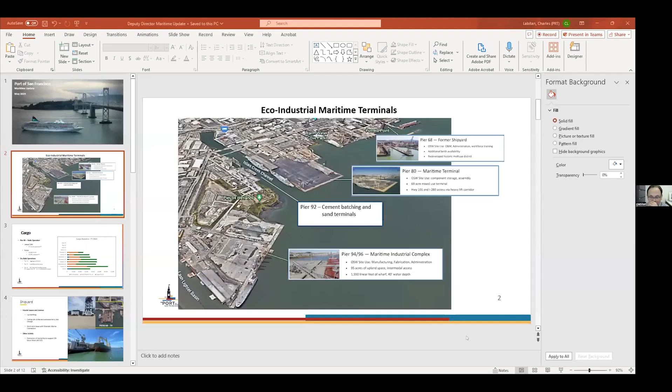Let me share my screen since I did not send it in. Make sure I do this right. There we go, can everybody see that? We can see it, thank you. So I'm with the Port of San Francisco, and Kristine did a wonderful job explaining what a port does.

And how ships enter the bay and make it down to Redwood City. However, they do pass San Francisco up here. So what I'm going to focus on today is really where the Port of San Francisco is at in terms of its business and trends, and what our plans are for the future.

As most of you know, the Port of San Francisco is very diverse. We have commercial operations, Fisherman's Wharf starting from Pier 39 all the way down to Pier 96. Along the way, we have ferry services, cruise ships, which is one of our biggest revenue generators, the Ferry Building, recreational areas, South Beach Harbor, and Oracle Park. So we're very diverse.

What I focus on is mainly the cargo operations. Let's see here, go to the next slide.

So we have what we call our eco-industrial maritime terminals. They start around where Chase Center is at, Mission Bay Park. We have our Pier 68, which is the former shipyard, and it goes all the way down to Pier 96, down by Heron's Head, which almost borders the Bayview area of San Francisco.

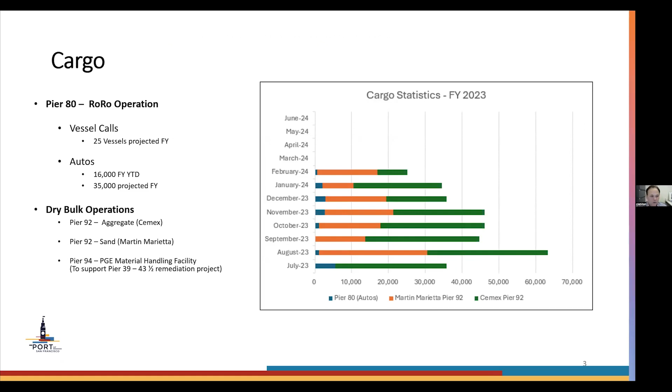I already mentioned the shipyard. This is our Pier 80. We are also planning to convert some of Pier 80 into cruise operations. This past April 27th, we had one of the Princess Cruises come in, and Metro, which operates a cruise ship terminal, brought their facility down and set up a pop-up type facility.

The reason why is because under the CARB rules, we're only allowed 19 cruise vessels into a facility that doesn't have shore power. And we only have one shore power hookup for our cruise ships, which is at our cruise ship terminal. So we had to divert one of the ships when we had 3 ships in port down to Pier 80.

And you can see how close it is to the city. We have Highway 280, which is only about half a mile away, and Highway 101, which is about 2 miles away.

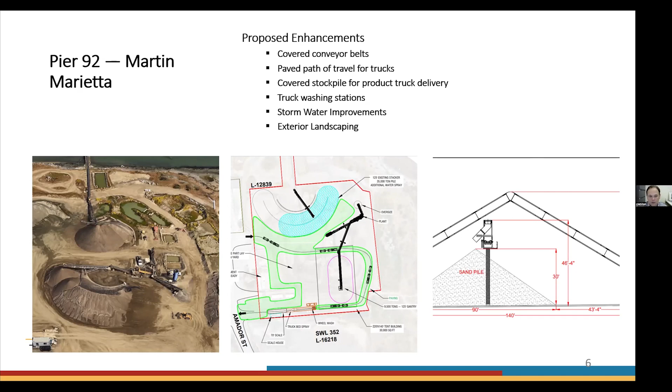Pier 92, Martin Marietta, they will be moving from Pier 94 to Pier 92, and they are setting up a modern type of facility that's going to be completely covered. That's because the Bay Area Air Quality Management District has been monitoring their operation, and we have a Bayview community only about half a mile away, so we're trying to reduce the air emissions. They're going to have to make their offloading from barges pretty much enclosed.

For Pier 94, 96, we have the offshore wind industry that we've been following for the last 2 years. We've had developers come out and give site tours, probably about 4 tours in the last 6 months. This is 95 acres of land.

As many of you know and have followed offshore wind, the industry is going to be so large that not one port can serve it. Long Beach and LA are planning to build a 300-acre terminal, and most of the work will be going down to LA. Port of Humboldt will also have a large facility up there. But those facilities are probably going to take a good 6 to 8 years to build out.

Our facility, we already have 95 acres, even though we would have to build up and strengthen the surface. We already have about 40 feet of draft depth along the wharf. So we can be an early stage development for offshore wind.

However, because of the 200 feet of airspace underneath the Golden Gate Bridge, we won't be able to build a full tower for the wind industry. What we will be doing is building the manufacturing and fabrication for the foundations. It also helps that CEMEX is only 100 feet or a few hundred feet down the road, and much of the foundations will be made of concrete and cement.

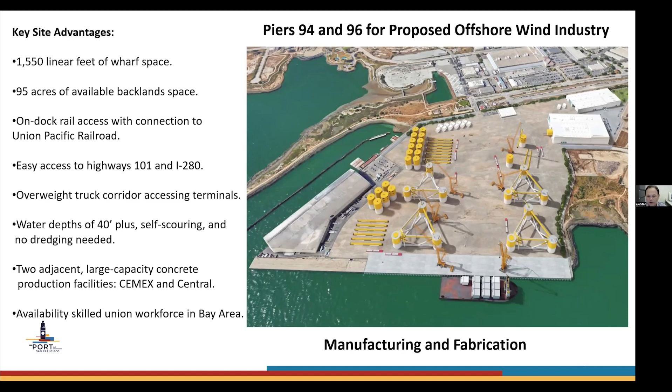Jumping over to cruise ships, because it is one of our larger businesses. So far this year, we've had 60 cruise calls. We have about 34 scheduled for the end of the fiscal year, end of June. We've had 235,000 passengers. Cruise has rebounded very nicely for us.

So there has been a rebound of cruisers coming in to San Francisco. Many foreigners, we're starting to hear them speak with their accents as you walk down the ferry building. We expect about 400,000 total for the fiscal year.

The other activities we have at the port, we have had the U.S. Navy's Harvey Milk. It was recently launched down in San Diego. It came up here. We had a launch ceremony with Congresswoman Nancy Pelosi, who came in for that.

We had a Japanese Coast Guard ship that comes in every year. We also had Sail GP, which many of you may not know is the Formula One for sailboats. We host that down at Pier 80, and that happens sometime in July.

We also have the Portola Music Festival. During the fall, at Pier 80, PASHA works with us to host this music festival. It brings in about 30,000 participants, and it's more like electronic dance music, but it's a big revenue generator for the port. We also host the San Francisco Fleet Week.

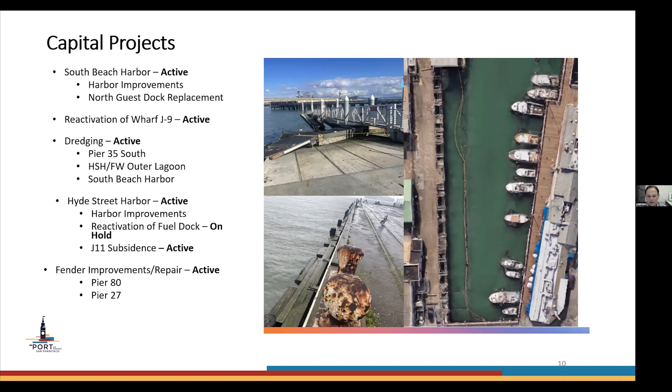Some of the equity things we do for the city: we host a youth sailing program, and PASHA helps us with that. We also have others that come in for Sail GP. We have an internship program with Tides, and we also work with Cal Maritime on internships.

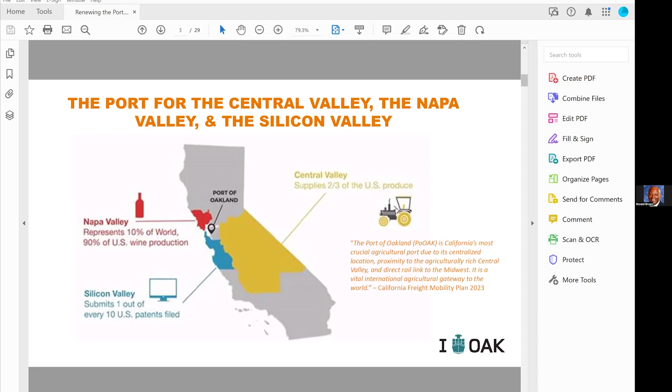Oakland is a little bit different than the ports of Los Angeles and Long Beach and many of the other ports in California, being that we not only manage a large seaport, which is mostly containerized, but we also manage the Oakland International Airport. As some of you know, we just renamed that to the San Francisco Bay Oakland International Airport, which has created a lot of consternation for my friends in San Francisco, but we're going to go with it.

We also manage a very large portfolio of commercial real estate along the coast between the Oakland San Francisco Bay Bridge and the Oakland International Airport. That's about 20 miles of commercial real estate that we manage. A lot of that is open space.

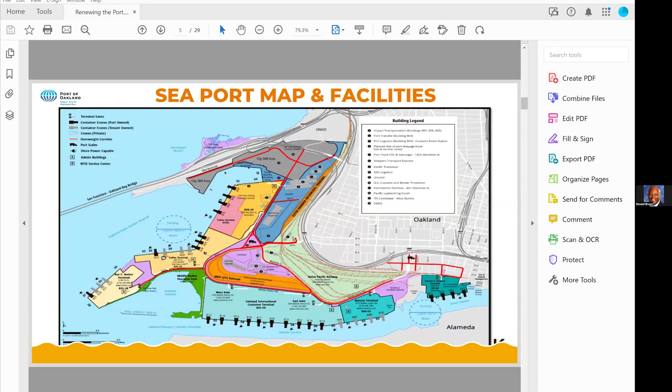This is a facility map of our port. I know Susan Ransom is on the call, so I don't want to fail to make it clear that the terminal she works at, the Oakland International Container Terminal operated by Stevedoring Services of America, handles about 70% of all the cargo moves at the Port of Oakland. We vastly appreciate them, and most importantly, we appreciate Susan. Oakland has 3 large international terminals and 1 large domestic terminal. The domestic terminal is the Matson Terminal, which is also operated by SSA, Susan's employer.

To give you a sense of the cargo mix that comes in and out of our port, on the import side a lot of it is consumer products—consumer electronics, furniture, apparel, footwear, toys, things of that nature. We also import a lot of wine and spirits from Australia and New Zealand. On the export side, by proximity, a lot of our exports are agricultural and recyclable products, primarily recyclables because they're going back to China—recycled paper, plastic, even glass—and that stuff is being reprocessed into products that we then turn around and reconsume.

This renewing process really started back about 10 years ago. The picture you're looking at here is our Cool Port complex, a 190,000 square foot temperature-controlled warehouse. It was actually opened in late 2018. This facility handles a lot of the beef, pork, poultry, fish products, and some other agricultural products that have to go out as either fresh or frozen.

It does have rail access, so it can accommodate up to 36 rail cars simultaneously that can go into this facility and then open up into a temperature-controlled zone, without breaching the cold chain for those products that have to be shipped out chilled or frozen.

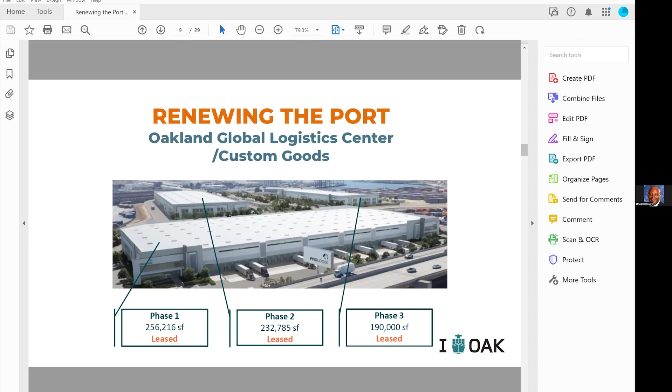They are state-of-the-art, brand new facilities and environmentally and CARB compliant. All right, the next map is really just showing some of the projects that we have going on as we go through this whole process toward zero emissions.

As you know, a lot of the zero emissions technologies are based around battery electric vehicles, battery electric equipment, or hydrogen fuel cell operated equipment.

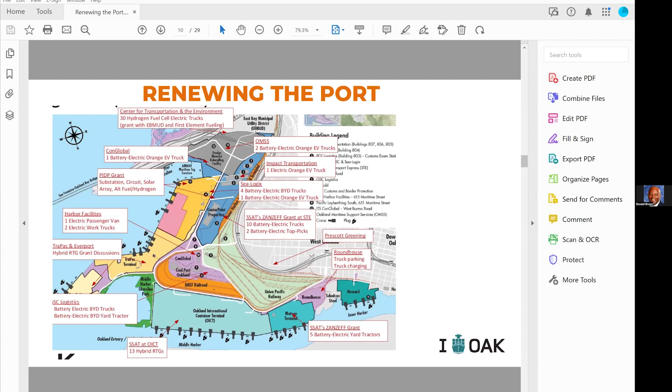We've been working with our tenants over the last 5 to 8 years as they've been implementing demonstration projects of some of the battery electric trucks and yard equipment, really just to show what can be done. We know the technology is still developing and some of it needs further development, but a lot of those demonstration projects are being conducted at the Port of Oakland, and other ports in California and throughout the US are observing how these projects are coming to fruition, simply so that they can begin adopting some of these technologies as well.

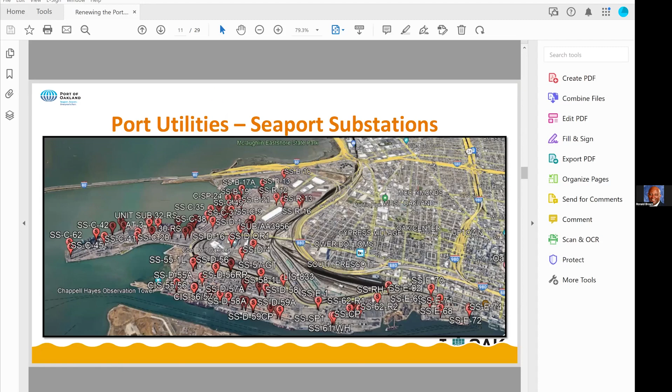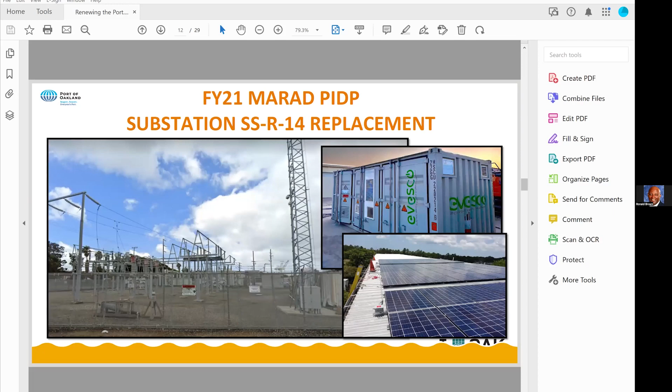Again, this port is going through an almost complete renewal process. This slide shows some of the projects in their entirety.

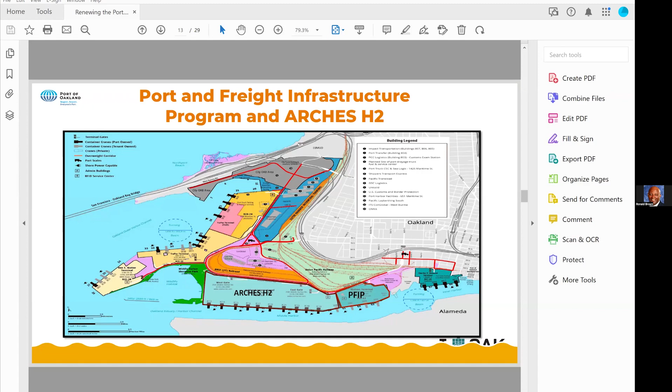The SSA terminal is going through a modernization process where we're updating the berths and wharfs to accommodate bigger vessels, and also updating the vaults on the terminals they operate to accommodate vessels of varying sizes. As we established the shore power system, vessel sizes grew so quickly that where our vaults were located became challenging to link into those vessels. So we're coming up with a new system that can be rotated up and down the berth and terminals to accommodate whatever size vessel is coming in.

How am I doing on time, Stas?

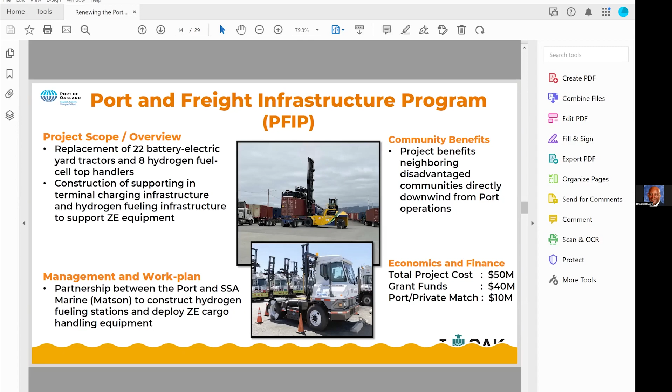You are doing very well. Thank you very much. All right, I've got a few more, so let me go.

Our ARCHES project - like other ports in California, and I'm hoping Kristine and Charles are also participating in this - we've been getting federal and state grants to improve our infrastructure. The Port of Oakland has been pretty successful, and maybe lucky, to accommodate about $600 million of federal and state funding to upgrade our infrastructure.

So we're vastly underway planning out those projects. Some of them will take multiple years to even get to the actual groundbreaking process, but a lot of our zero emission projects we can move on almost immediately.

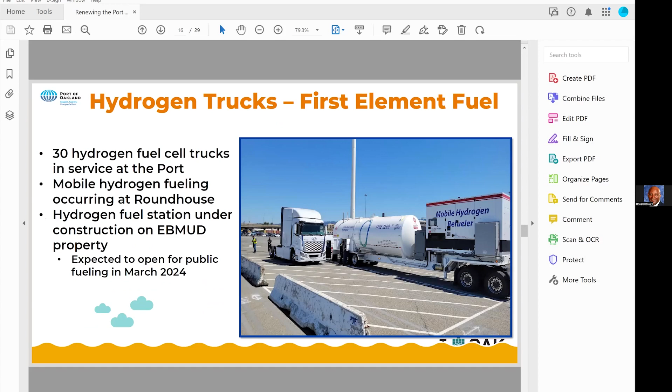One of them has been our mobile hydrogen fuel cell system that we put into place. It was meant to be temporary because we are building - and happily I can announce we have completed our permanent hydrogen fuel cell facility. But prior to that, we did install a mobile fueling facility for vehicles that needed refueling with hydrogen.

This is the First Element Fuel station - the first of its kind in the world - able to provide compressed hydrogen for over-the-road trucks. We are also making this available for people with personal vehicles so they can fuel their personal hydrogen vehicles through this facility. This facility opened up about two weeks ago in Oakland. So it's the first in the world, with many more to come.

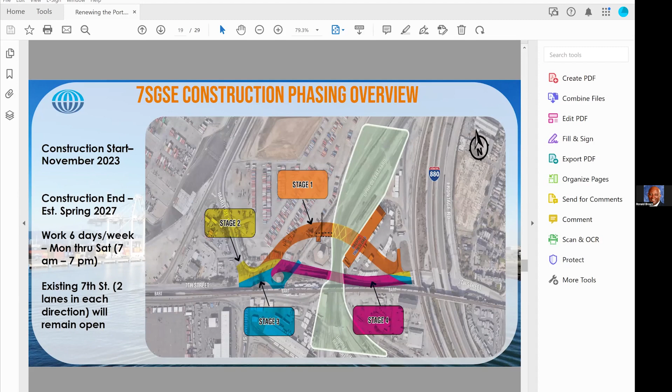A couple of other things we've done: we've updated our portal for those who want to see where vessels are and what the turn times are for trucks coming in and out of our terminals. All that information is now available on your phone through a mobile portal showing turn times at the terminals. I know sometimes Susan doesn't agree with them, but we do have that information available. We also have camera views of each terminal gate, so you can see what's happening at each terminal and make sure there's traffic movement on those roadways.

Moving quickly because Stas is giving me the ugly eye - we can also show where vessels are in the bay, but most importantly, where they are at our port.

Some people like to look at that, particularly the beneficial cargo owners, because they try to plan when they want their product, their cargo to be delivered to the port in order to meet the specific carrier cutoffs or the earliest receiving dates for that cargo.

Okay, turning basin, a big project for us. We have to do it to make Susan happy. The vessels, as I mentioned, are getting bigger and bigger, and our turning basin is about 40 years old, so it needs to be widened to accommodate the longer ships coming through.

We are in the process of getting all of our environmental approvals. We've gone out for public comment and haven't gotten too much pushback on it. I think everyone knows that the Port of Oakland is really the industry in Oakland. Everyone thought we were a sports town, but that product has gone away. Oakland is a port city, and you'll find going forward it's going to be promoting itself as such.

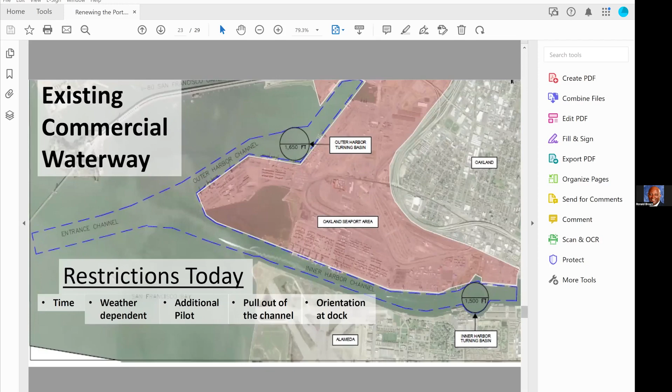Again, the Port of Oakland is going through a complete renewal process. I'm hoping if I'm around 10 years from now and all these projects are done, I'll be able to say they were all done very successfully. I expect them to be so. Look forward to your Port of Oakland, your containerized port in Northern California, to be a whole new port within the next 4 to 5 years.

That's it for me, Stas. That's my story, and I'm sticking with it.

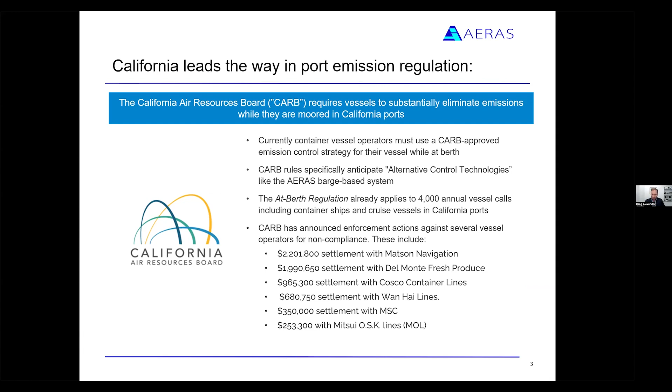Shore power is an option for some vessel types, and certainly an attractive one for some operations. Obviously, it requires really massive infrastructure investment and government alignment. It takes a lot of grid power, and the grid is constrained these days. I think currently there are about 65 berths across the state that are shore power equipped, but none of those for ro-ro terminals or tanker terminals, with one exception. The Port of Long Beach has one berth that can plug in a couple tankers.

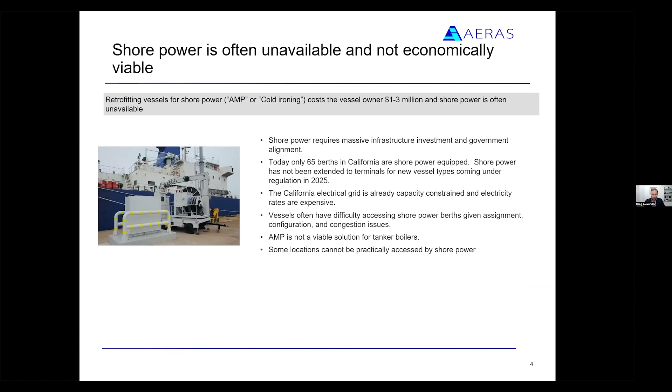AMP, or alternative maritime power, cold ironing, shore power - they all mean the same thing. They're not a viable option for boilers, right? There's no easy way to plug in a boiler. So there are some challenges, and alternatives are needed. That's what we do.

So AERAS provides emission reductions when vessels are at berth. That's designed to treat auxiliary engine and boiler emissions. It's a barge-based system, as I'll show in a few photos here.

So how does it work? We coordinate with the vessel prior to arrival. We pull alongside once that vessel is berthed, articulate our connection device to attach to the exhaust port itself, draw and cleanse those emissions while the ship is at berth. We remain there as long as the ship does, pulling off just before the ship leaves, and then provide documentation about that compliance after the vessel call is done. So in a nutshell, that's what we do. Respecting time, I'll leave it at that. Obviously, there's a lot of engineering and chemistry and other design functions that go into that cleansing, but big picture, that's what we do.

Some of the special sauce - it takes creativity to engineer the connection devices to work on the types of vessels that we see. There's a lot of monitoring of the emission flows coming in as well as exiting our system. We use both in-person and live remote surveillance to maintain safety and control of the system, where we target and treat particulate matter, ROGs - reactive organic gases - and NOx, nitrogen oxides. That's what's required under the at-berth rule. We've been doing it a bit under 1,000 hours currently, and like anyone in the maritime space, if it's not safe, you don't get off the starting line unless you've got safety as a primary focus, and that's the same for us.

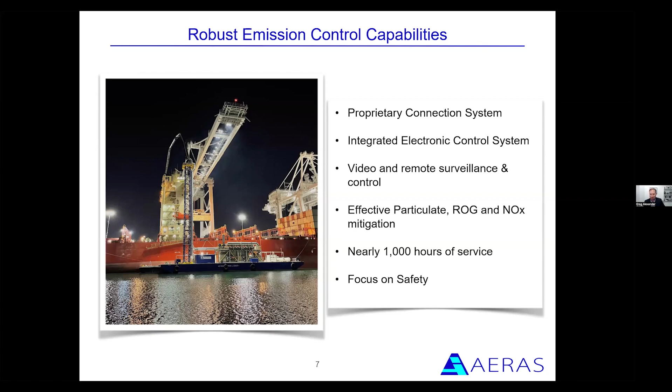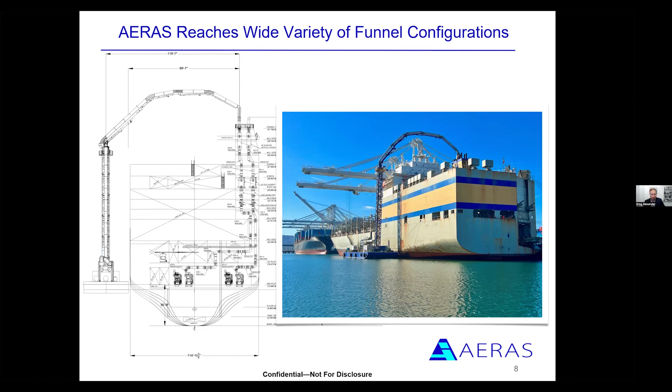One challenge in our business is that ships aren't all shaped the same, thankfully. We've got purpose-made ships for lots of different functions. We designed our system to be very flexible there - we can reach a variety of vessels, both in heights and widths and various configurations. We do a modeling process before we get on a vessel, before the vessel arrives, as part of our commissioning, to make sure that we can reach safely.

Like anyone, it's all driven by the at-berth rules. So our system is approved by CARB for certain classes of vessels. We're working to expand that, and it's been a good working relationship with CARB to get to this point. We're looking forward over the rest of this year and the coming years to expand what we do - not only the ports we service, but the types of vessels.

And with that, Stas, how about that? Under 10 minutes, huh? You absolutely did great, Greg. Thank you very much.

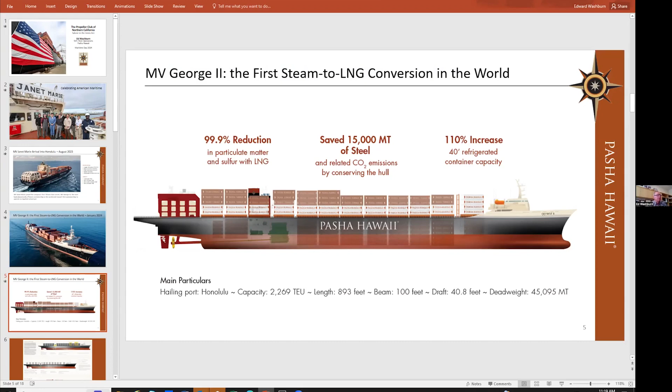In 2024, we just repowered it to an LNG diesel ship and changed some of the cargo configuration. We more than doubled the reefer capacity, kept the same horsepower, gained over 50% in fuel efficiency, and we're burning a much cleaner fuel.

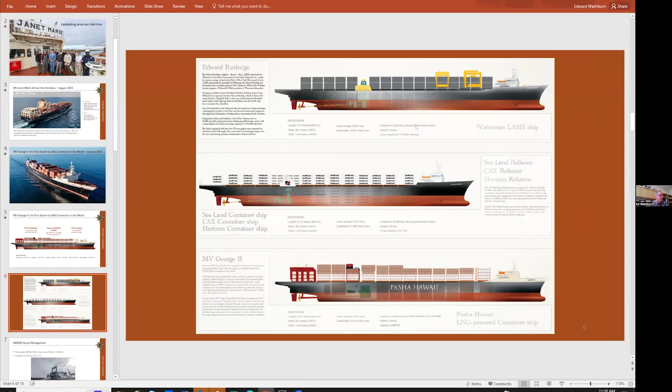So great improvement there. It's really going to be a state-of-the-art terminal. However, there's no labor reducing automation. It's just going to be really efficient.

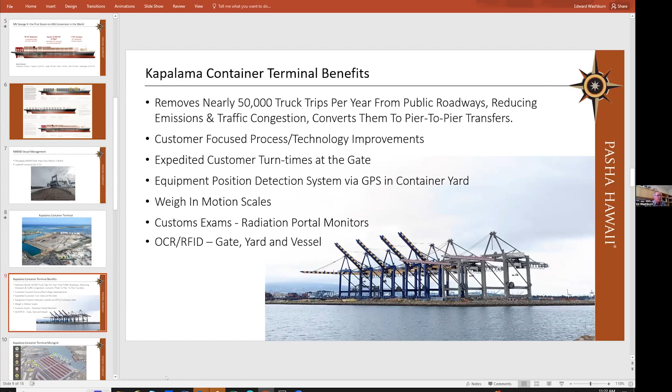The other cool thing we're doing there is we're going to be able to run this terminal for 36 hours without the electric grid, without power from Hawaiian Electric Company. We're going to utilize crane regeneration when we lower a load, storing that in battery energy storage systems. We're going to have solar, wind, and a natural gas powered diesel generator. The goal is to operate 36 hours, enough for 2 crane operation and all the yard equipment, so we can discharge our new Ohana class ship and get it out of the terminal to customers in case of an earthquake or hurricane. If the island doesn't have power and the terminal doesn't have power, we'll still be able to get the needed supplies to the people of Hawaii.

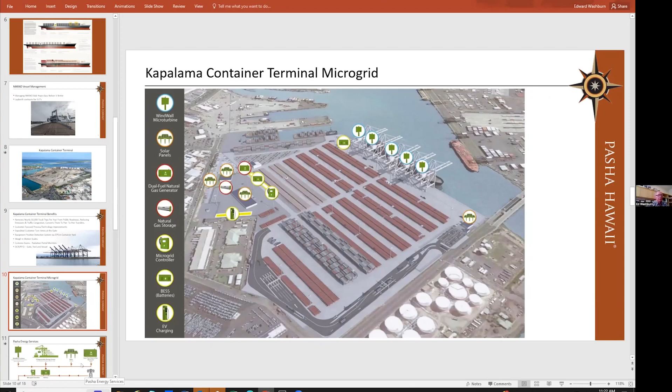This is kind of how it looks: wind turbines, regenerative crane, solar, natural gas generator, into battery storage. Also, the grid can come in. The cranes will flow both ways, taking power and also bringing it back to the batteries. And then we'll have EV chargers. We're going to have a lot of electric equipment in the terminal and then regular terminal equipment in buildings.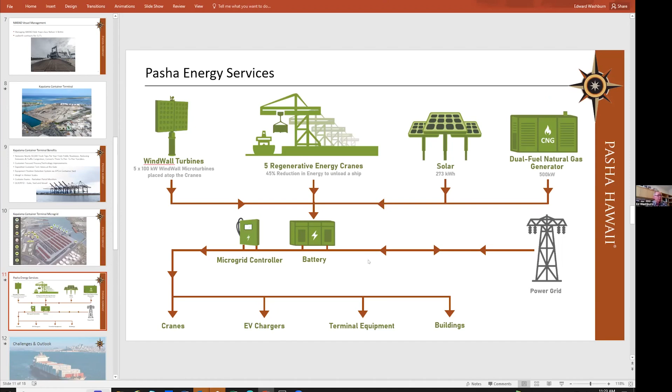Some of our challenges coming up: first of all, we're a Jones Act carrier, and our main business is supporting Hawaii. In Hawaii now, tourism is slower than it had been prior to the pandemic. A big part of that is the Asia visitors have not rebounded fully. But what has happened is there's a lot of construction going on in Hawaii, so the locals have taken up much of that slack. The economy is growing at a slow rate; we expect it to be less than 2% for the next year or two.

But the labor market is strong, a lot of construction. Maui relief is part of that. Maui is also part of the reason why visitor spending and the visitor economy is down, since many of the hotel rooms in Maui are still booked or filled with people who are living there. So there's a lack of hotel rooms in Maui, and as I said, a lot of construction workers.

The other challenge is always the Jones Act, and it's always being challenged. The Cato Institute is one of the probably biggest challengers, spending the most money. The Jones Act makes us constantly reliable on time. The pandemic is a perfect example of that — we didn't raise our rates, where Trans-Pacific rates were 9x or 900%, and we didn't abandon our customers for the huge profits available in the Trans-Pacific.

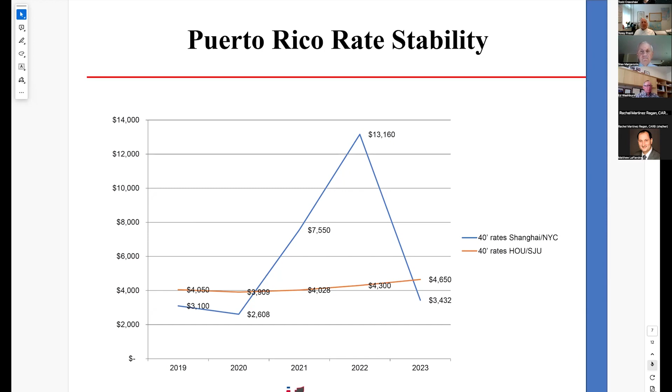Getting to Puerto Rico next. Next slide, please, Todd.

The good: manufacturing, as we talked about, pharmaceuticals is over 50% and has led to a positive balance of trade. So that's been very, very positive. If you buy any Tylenol stateside, it was all made down in the southern part of Puerto Rico.

Tourism is brisk and it's not returned to pre-COVID days, but it's getting close. And the large projects are starting to move. The power and generation from FEMA, rebuilding of the infrastructure, but maybe more importantly is the DOE's position.

The Department of Energy, led by Jennifer Granholm, the secretary, has done a remarkable job on the island and has basically earmarked $1 billion for sustainable energy. So solar panels, batteries, wind are all beneficiaries. They have a goal, like everybody else, of 2050 to be self-sustaining. So, and they're on the right track.

COVID has set them back a little bit, but given the fact that the island is nothing but sun, they should be good. The amount of solar panels and batteries, I hate to say it, all coming from China and from Chinese suppliers in Vietnam and Indonesia are flooding the market. Last week, you saw Biden put in the punishing duties of 100% on EV cars, 25% on panels. So there's a big rush to get these things into the United States before the tariffs take effect.

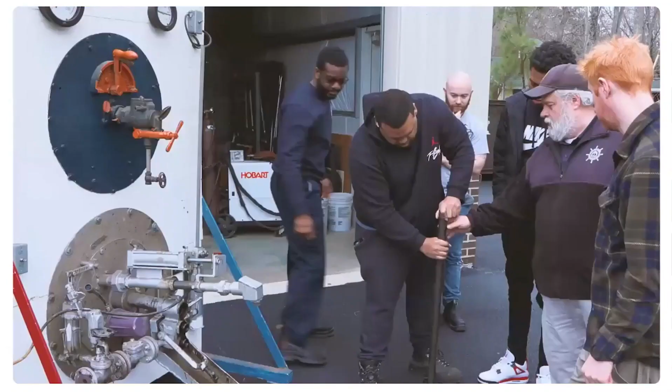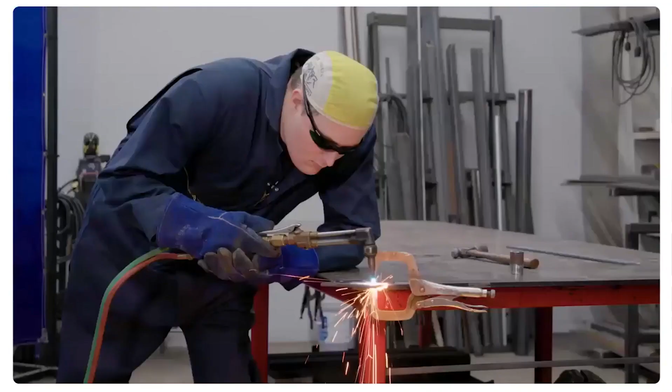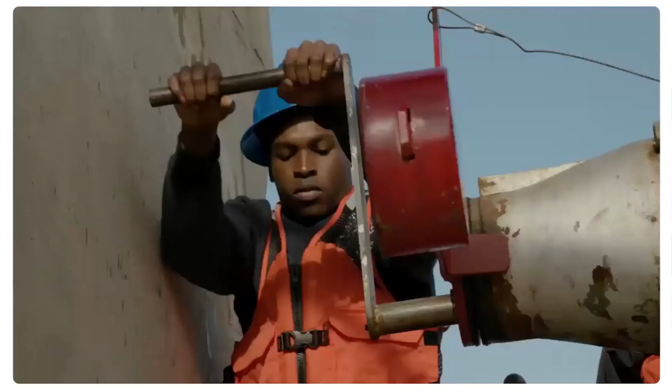The Seafarers International Union represents the top trained, most efficient crews of U.S. Merchant Marine, sailing across all bodies of water aboard U.S. flagged vessels. A key to meeting the standard is the Paul Hall Center for Maritime Training and Education. The 70-acre waterfront campus just south of our nation's capital has been training individuals for successful careers at sea since 1967 and includes a state-of-the-art firefighting and safety training facility. The Unlicensed Apprentice Program includes 4 phases of classroom and practical instruction with time spent learning aboard the training vessel Freedom Star. In our UA program, students dive deep into skills needed for deck, engine, and steward departments on board a vast variety of ships.

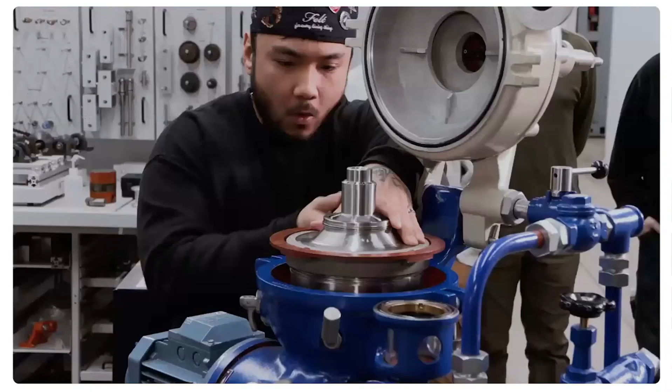The facilities here at Piney Point are state-of-the-art. The instructors are great. Your room and board, all your training is covered at no cost to you. All you have to do is put in the work and you're guaranteed a job. Upon completion of the UA program, students will sail aboard a U.S. flagged ship and will become a full member of the Seafarers International Union.

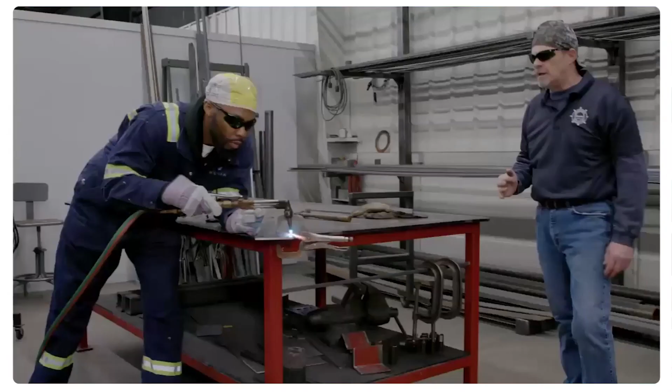If I were a young person today, I would highly recommend that they come and look at this school. There's a lot of skills you can learn, make a great living, and have security with the union with great benefits. The Paul Hall Center offers opportunities for graduates to return and upgrade their classification, and has a learning track leading to an associate degree in applied science. It really has been an amazing journey at school. Not only has it given me skills that I need for my time at sea, but I've also been able to come back and upgrade my classifications to help advance my career. And now, I can really call myself a seafarer.

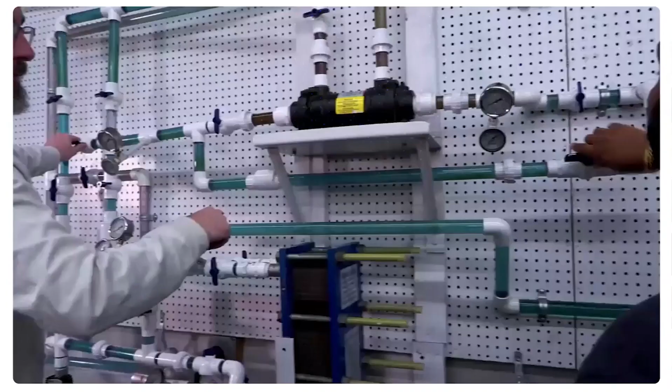Now's your chance. Here's your opportunity. Learn from the best. Become the best. Your journey begins here. Are you ready to say, I'm a seafarer? I'm a seafarer. I'm a seafarer. I'm a seafarer. For more information, check out our websites at mymaritimecareer.org or seafarers.org.